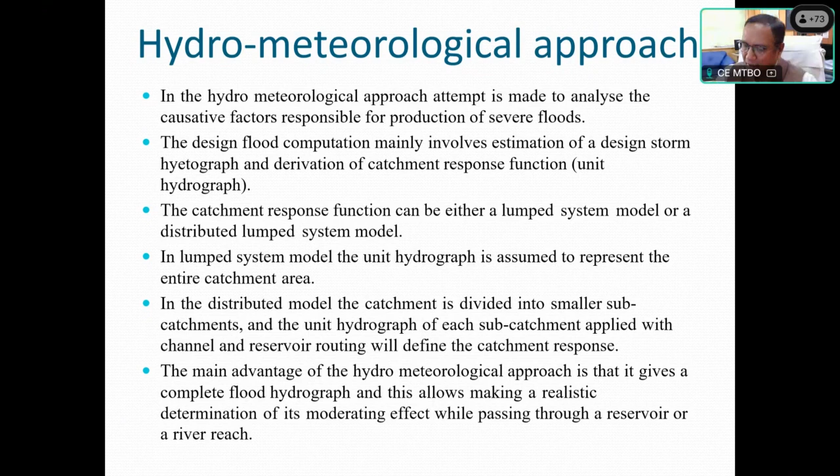And this allows making a realistic determination of its moderating effect while passing through a reservoir or a river reach. Now, as already I told, when you are going for the design flood using hydrometeorological approach, then the storm study is one of the most important components of design flood analysis.

So for storm study, what is required? Daily rainfall records of all rain gauge stations in and around the region under study, then rainfall data of self-recording rain gauges, and data of storm dew point and maximum dew point temperature. This is a very Herculean task - a lot of time is required. So just to save that time, Central Water Commission, in association with IMD, and even IMD alone, have published the Probable Maximum Precipitation (PMP) atlases.

In those PMP atlases, how has it been formulated? For making those PMP atlases, data right from 1906 up to say year 2014-15, whenever the study started, is used, and the PMP atlases are also revised after every 10 or 15 years. By that time, whatever storm records are collected are analyzed, and it starts from rainfall data only. Based on the rainfall data, storm isohyetal maps are prepared. For most of the severe storms, storm isohyets have already been prepared by IMD, and those have been incorporated into the PMP atlas.

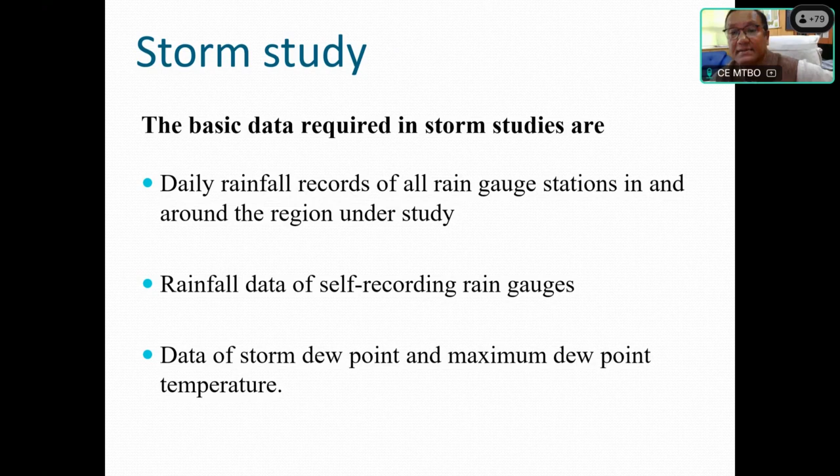Now, another important aspect - a number of people get confused whether to consider 24-hour storm, 1-day storm, 2-day storm, or 3-day storm. Its answer lies in the unit hydrograph. For all practical purposes, the unit hydrograph base governs the duration of storm depth. For a unit hydrograph having a base of 24 hours or less, your 1-day storm shall be sufficient.

Normally we consider TP, time to peak of the unit hydrograph, as one of the criteria too. Suppose your time to peak is 14 hours, and your base is 28, 29, or 30 hours. So 10% of 14 is 1.4, giving a total of 15.4. So any storm having duration of 16 hours or more will suffice your requirement. In that case, your 24-hour storm or 1-day storm shall be sufficient.

In the case where the UG base is more than 24 and less than 48 hours, normally we consider like that, but even up to 32 hours you can - you should consider 1.1 times TP also. But if it says 46 or 40 hours, then you have to consider your time base of the unit hydrograph as 40 hours, and you have to consider a 2-day design storm. For basins having UG base of more than 48 hours, a design storm of 3 days should be considered. Normally in Indian conditions, for more than 3 days storm, isohyets are not prepared, so maximum 3-day storm shall suffice for any type of catchment. Storms of period exceeding 72 hours are not generally required to be considered in the design flood estimation.

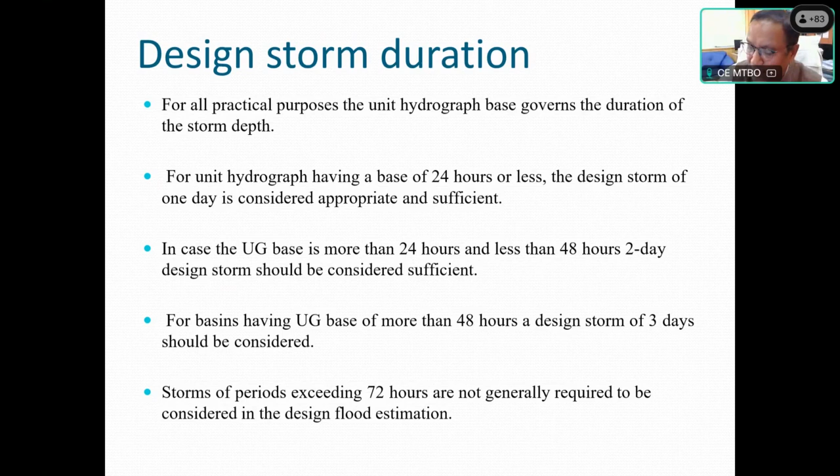Now, how are we estimating the probable maximum storm or SPS, standard project storm? The most common method of estimating probable maximum storm for a project basin is one involving the transposition of selected major storms to the project basin and its maximization there.

This statement doesn't mean that the storm should have occurred only in the project catchment. No, there are criteria for storm selection. Like in the plain area, I will show you which storm can be considered for transposition into the project catchment. So the 3 main steps of transposition and maximization of the storm are: selection and analysis of past major storms on record considered transposable to the project basin. First, remember this - this is very important. You have to select all those major storms which can be transposed into that project basin, and the criteria of transposition will be discussed.

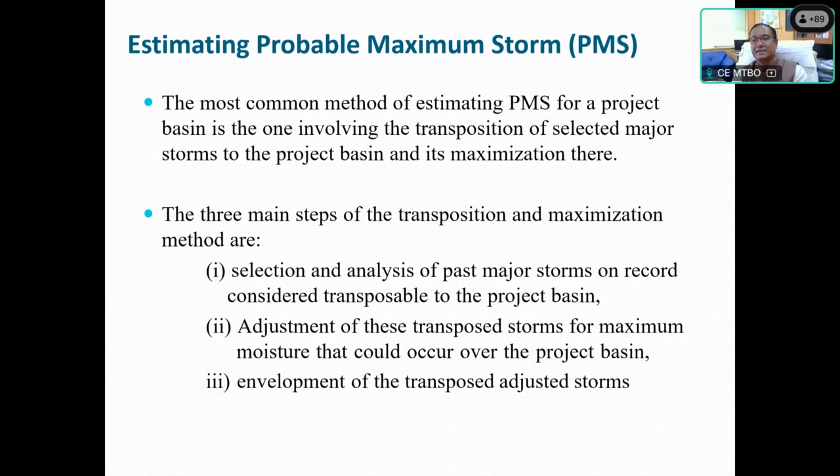Then adjustment of these transposed storms for maximum moisture that could occur over the project basin - that is called the maximization technique. How much extra rainfall could have taken place if, say, the dew point temperature had attained the historical maximum - that is called the maximization of the transposed storm. Then envelopment of the transposed adjusted storms. So these are the three main steps for estimating the probable maximum storm or standard project storm.

Now, what is the criteria for storm transposition? Storm transposition means application of a storm from one area to another area within the same meteorologically homogeneous region.

That is important. You cannot consider the Eastern Ghat storm into Western Ghat, or Western Ghat storm into Eastern Ghat. You cannot take it like that. So it should be meteorologically homogeneous. Like a Ganga Basin storm, we cannot put into the Brahmaputra Basin, and a Brahmaputra Basin storm we cannot bring into the Ganga Basin. So that should be a meteorologically homogeneous region.

The orientation of storms should not be adjusted by more than 20 degrees. For every storm, by seeing the isohyet, you shall be able to know its orientation. So while maximizing the storm in the project catchment, we can rotate the entire isohyetal system, but that rotation should not be more than 20 degrees. This is one of the criteria formulated by WMO, and everybody follows it.

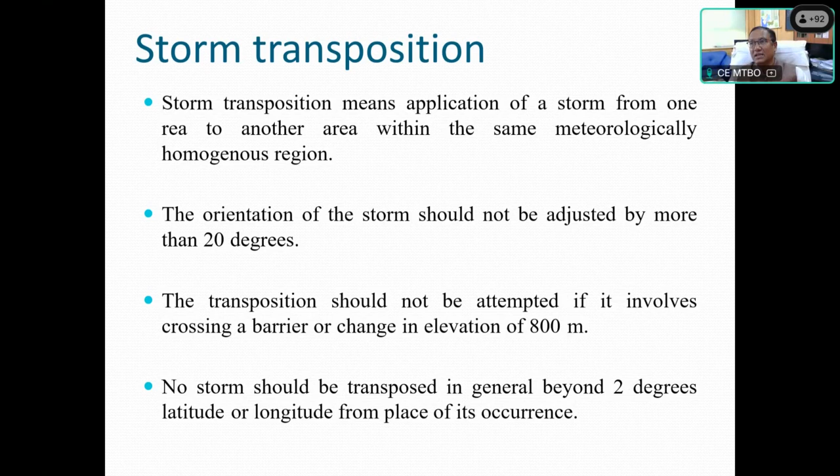Considering those tracks, the 2 degree criteria is applicable for many of the storms. It will not deviate by more than 2 degrees from its track. That's why this 2 degree latitude-longitude criteria has been given, but this is for plain or rolling type terrain. This criteria is not applicable for hilly terrain where the precipitation is of orographic nature.

Now, what is another criteria for storm selection? The area of transposition is considered as 2 degree by 2 degree longitude for nearly flat regions, and 0.5 degree by 0.5 degree to 1 degree by 1 degree in mountainous regions. This is as per para 5.2.2.1.1 of the WMO manual of 1986. This criteria has been evolved by WMO and is followed by most countries.

Coastal storms, storms centered west of the Western Ghat and east of the Eastern Ghat, were not transposed to catchments located far inland. This is very important. Suppose some storm has occurred in Kerala - you cannot transpose that storm into Tamil Nadu, because there is a barrier with height more than, say, 6,000 feet. So since the barrier is there, you cannot transport that storm by way of the basin. And that is a coastal storm occurring in Kerala, but that storm can be transposed along the coast.

Further, suppose a barrier is not there - for example, a storm occurred near Gujarat along the coast. Can I transport that, say, 150 kilometers inward? No, that should be avoided. Normally you can go up to 50 or 100 kilometers from the coast. Beyond that, the storm should not be transported, because the coastal storm has different meteorological conditions, so you should not transport those storms further inland.

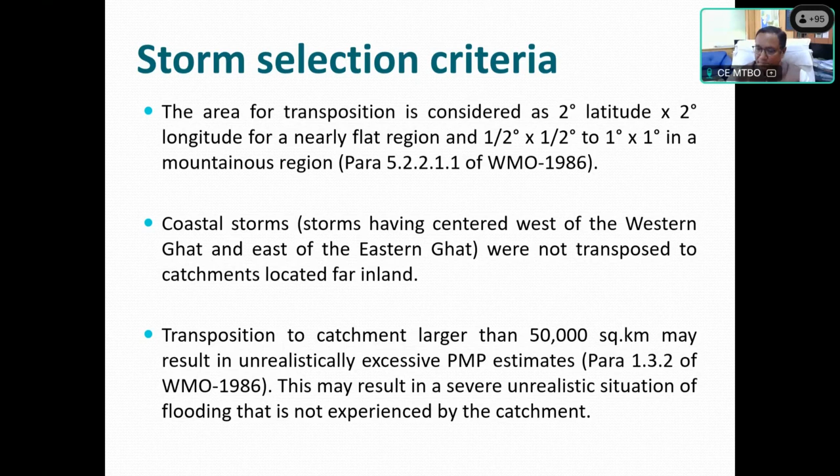Now, how are we going to select the storm and how are we going to calculate different adjustment factors? The first step is to select the transposable storm with maximum rainfall depth and having areal extent to cover the entire catchment.

Suppose you have got 5 storms. One storm has given a 1-day storm of 300 millimeter, another has given 350, another has given say 400 millimeter. But while you see this 400 millimeter rainfall and its isohyet, suppose your catchment area is 20,000 square kilometer, but the outer isohyetal extent of that 400 millimeter maximum depth recorded rainfall is only 16,000 square kilometer.

Then we will not consider that 400 millimeter maximum depth storm. We will check the 350 millimeter rainfall, and see whether it is covering the entire catchment. If it is covering the entire catchment, then we will go for the 350 millimeter rainfall, because if we selected the 400 millimeter storm, the overall catchment representative depth would be less than what we get using the 350 millimeter storm. So we have to consider both the depth and the catchment coverage, whether the storm selected covers the entire catchment or not.

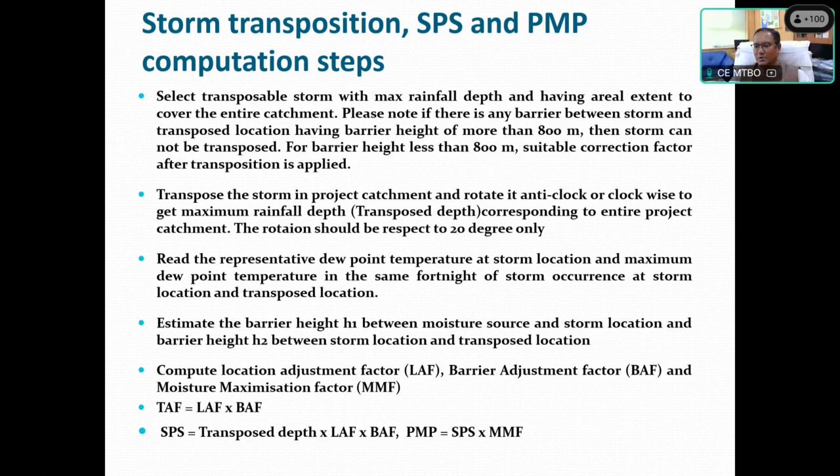Now I will explain how these adjustment factors are worked out, and you should be very careful whenever computing the adjustment factor. It is very easy, but you have to be methodological - follow the procedure step by step. So this is the same moisture source, like Bay of Bengal, and storm occurred at this location, where it is written storm center, a red dot is there.

Now from this location, our project catchment is somewhere here, and wherever in that project catchment we are going to transpose, that will be the transposed location.

Now from the moisture source up to the storm center, there is one barrier. That barrier height, the differential height, shall be called H1. And from storm center to project location, when you are transposing the storm from here to that location, you have to see if there is a barrier. That barrier height we get is H2.

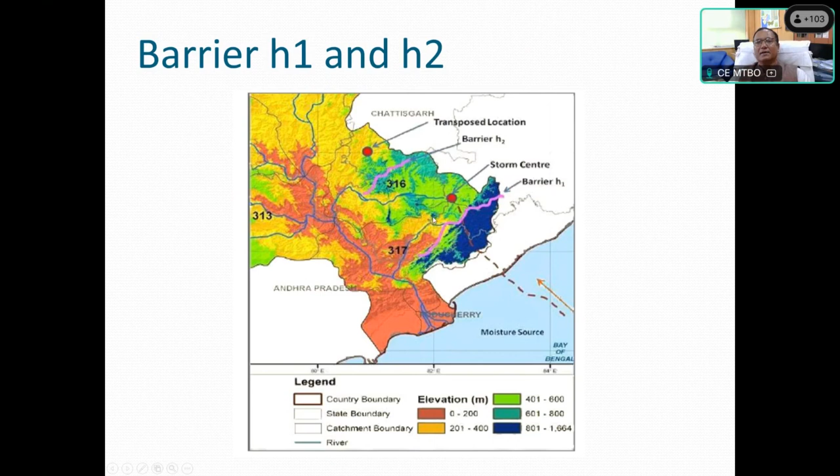Now, how is the location adjustment factor calculated? As it is written in our PMP atlas, outstanding rainstorms in a meteorologically homogeneous region surrounding a project basin are often transposed to the basin to frame the PMP estimate for the project basin. The transposition of a rainstorm necessitates application of two adjustment factors: for location and for barrier.

So the location adjustment factor, LAF, is equal to W3H1 divided by W2H1. This same nomenclature is given in the WMO manual also, so there should not be any confusion. Whatever is given there, we have given in our PMP atlas in the same way.

Now see, H1 is the mean crest elevation of the barrier. As I already told you, suppose somewhere the elevation is 1000 meters, somewhere 950 meters, somewhere 900 meters, somewhere 800 meters, then you have to take the average of that.

So it is the mean crest elevation of the barrier between the rainstorm center and source of moisture, with mean crest elevation higher than that of the rainstorm center.

If it is lower than the rainstorm center, then H1 will not be required. But if it is higher, suppose the rainstorm center elevation is 300 meters but the barrier height is 500 meters, this 200-meter difference is there.

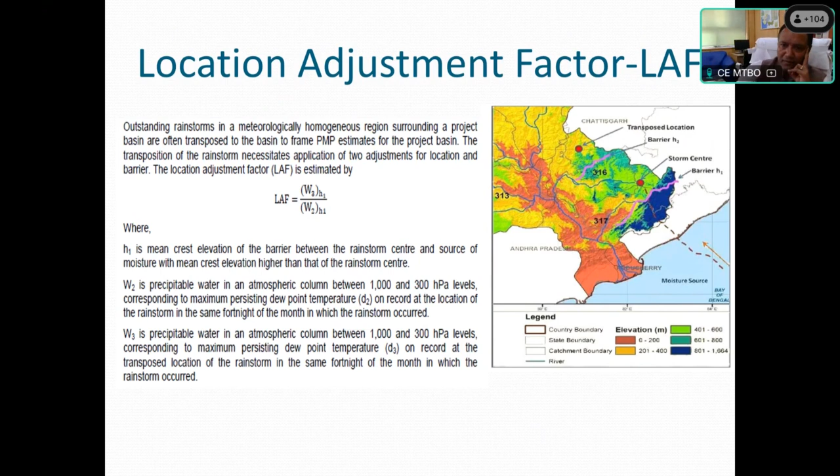Okay, so using this equation, LAF can be calculated. Now, the barrier adjustment factor - I have shown one schematic diagram also for this.

What is this? This blue column that I'm showing is the moisture column which is going to precipitate. Now if the storm is occurring from, say, the windward side, from the sea side, and one barrier is there, then what will happen?

And this barrier is continuous. So corresponding to its crest, its mean crest elevation, the rest of this portion that you are seeing from here to here...

...this much moisture will get precipitated on the windward side. On the leeward side, meaning after the hillock, only this much, what you are seeing through the red arrow...

...only this much precipitation or moisture is available which can get precipitated on the leeward side.

So to account for that, this barrier correction factor is applied, and this is very important because most people do carry out mistakes while estimating the barrier adjustment factor.

I have seen a number of experts, very good experts - while I was estimating for the Sardar Sarovar project, they considered one storm but did not apply the barrier correction factor, even though a barrier was there.

When I applied that barrier correction factor, the flood they estimated was of the order of 1,71,000 cubic, but I got 1,04,000 cubic. So you can imagine around 66,000 cubic difference was there because of that barrier correction factor. So that is very important.

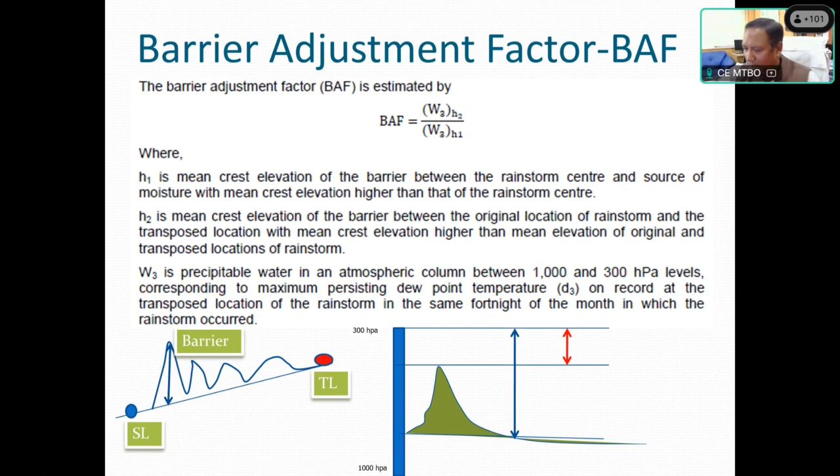Now, another important correction factor is the moisture maximization factor. This is used to convert standard project storm into probable maximum storm. So MMF is equal to W2H1 divided by W1H1.

W2 is the precipitable water in the atmospheric column between 1000 and 300 HPA corresponding to maximum persisting dew point temperature D2 on record at the location of storm, and W1 is the precipitable water in the atmospheric column between 1000 and 300 HPA level corresponding to representative persisting dew point temperature at the storm location. So this is in situ, where the storm occurred.

At that location, moisture maximization factor is applied, because whenever we are computing probable maximum storm, our PMP depth is always calculated. First you calculate the SPS depth, then multiply with moisture maximization factor. That will give you the value of PMP.

Or you can directly calculate, if you multiply moisture maximization factor with LAF and BAF, you get the moisture adjustment factor, and your PMP will be transpose depth into MAF. But I will again say you should follow this step: first calculate SPS, which is equal to transpose depth into LAF into BAF.

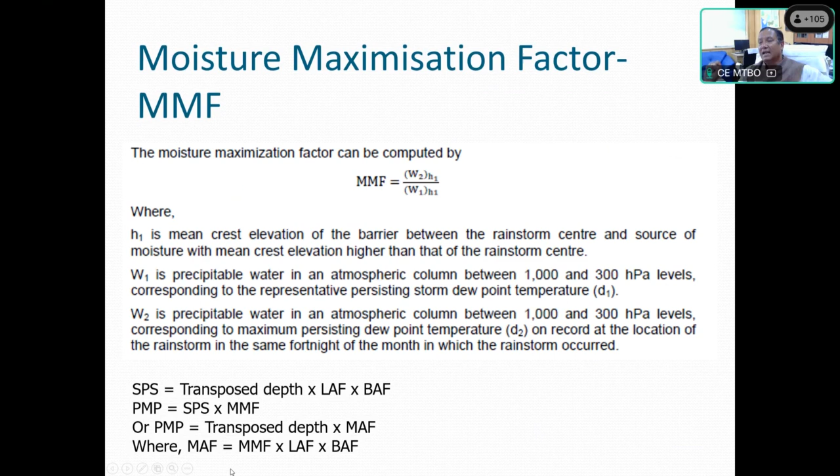First calculate SPS using transpose depth into LAF into BAF formula. Then calculate the PMP value by multiplying the SPS with MMF, because PMP can be equal to the SPS or more. Normally PMP will be 20% or 25% more depending upon the moisture, or 7% more if near the coast, but in inland areas it may be even 40% to 45% more than the SPS. PMP value can never be less than the SPS. This basic fundamental you should always remember.

Now, this was all about the storm: how we select it, how we transpose it, and how after transposition we calculate the SPS depth, standard project storm, used for the SPF calculation, or PMP depth, by applying the suitable correction factor.

Now, let us discuss about the basin response characteristics, that is the unit hydrograph. So what is the unit hydrograph? That is the response of the catchment for one unit of rainfall excess. That unit may be 1 centimeter, 1 inch or 1 millimeter. It hardly matters, you can consider any unit.

But if you are considering here 1 centimeter, then your rainfall should also be in centimeter. If you are considering 1 millimeter, then your rainfall should also be in millimeter, because once you have made this unit choice here, you have to use the same unit there also.

If you have considered here 1 centimeter and made the 1 centimeter unit hydrograph, but your rainfall is in millimeter, and you multiply this 1 centimeter unit hydrograph ordinates with the millimeter rainfall, then you are committing a big mistake. In that case, you have to convert this 1 centimeter.

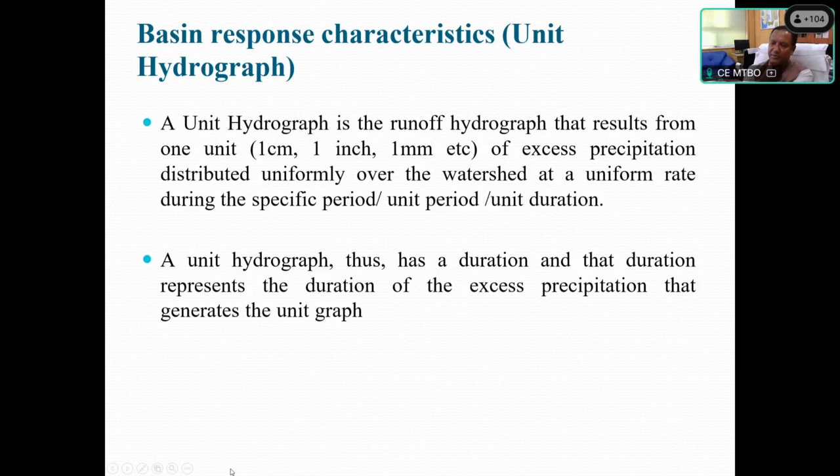In that case, if a 1 hour unit hydrograph is there, then you can take the hourly distribution coefficient, and using that hourly distribution coefficient, you can go for the convolution.

Now, derivation of unit hydrograph. The unit hydrograph is best derived from the observed hydrograph resulting from a storm which fulfills two basic conditions. Number 1, the rainfall is more or less uniformly distributed over the basin and has a reasonably uniform intensity. Such a hydrograph will generally form a simple and short peak.

If such an observation is there, then using Collins method - and all those methods are given in the textbook - you can work out the unit hydrograph for that catchment. Another way, if you have concurrent rainfall and discharge observation data, then using the Nash and Clark method also you can derive the unit hydrograph from the observed data.

If such a hydrograph is not available, then the unit hydrograph has to be derived from the analysis of an observed complex event. For a complex event also, the Nash model is a good alternative - using that complex event, you can make the unit hydrograph.

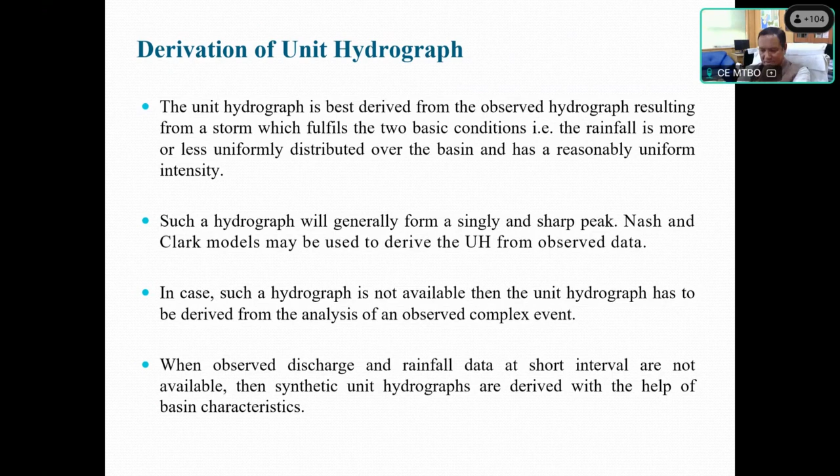When observed discharge and rainfall data at short intervals are not available, then we can make this synthetic unit hydrograph using the basin characteristics like longest flow path, catchment area, basin centroid, basin centroidal longest flow path. Using those, there are the Snyder's method and flood estimation reports.

Central Water Commission has published a number of flood estimation reports for different regions, like FER 2A for North Brahmaputra, FER 7, FER 3A, 3B - a lot of flood estimation reports of different regions of the country are available. So if you are estimating the flood and you don't have observed data, it is better to use the flood estimation reports of CWC.

Don't use the Snyder's method, because in these flood estimation reports, the fundamental is the same as the Snyder's method, but here the coefficients have been worked out for the different equations, based on a number of observed data at different bridge sites. It took a lot of effort to prepare those flood estimation reports, because that data was collected in association with the Ministry of Railways and Ministry of Surface Transport at a number of bridge locations.

This hydrograph or hourly gauge data and discharge data were collected, and in the project catchment, a number of rain gauge stations were also installed. A lot of data was collected for a fairly long period, 10 or 15 years. Using that observed data, these synthetic unit hydrographs or flood estimation reports were developed.

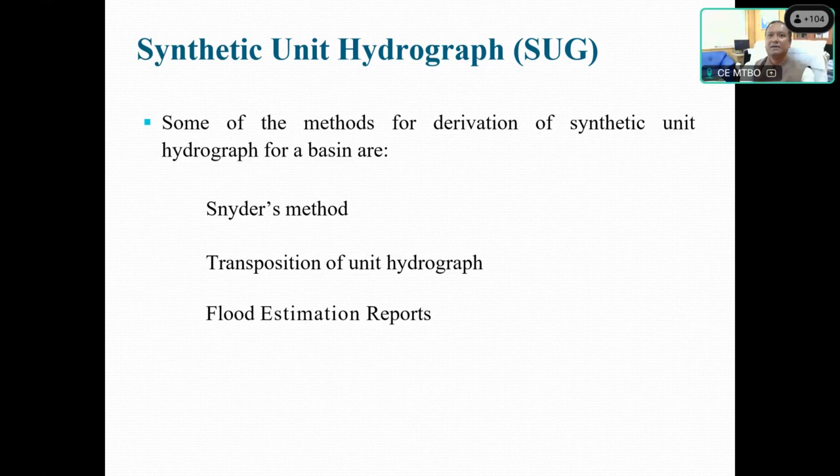Now, design flood hydrograph. For estimating the design flood hydrograph, the effective rainfall increments of each bell are rearranged with respect to ordinates of the unit hydrograph such that the maximum rainfall is placed against the maximum UG ordinate, the next lower value of effective rainfall against the next lower value of synthetic UG ordinate, and so on. That is called the critical sequencing.

Once you have got the unit hydrograph, and then you have got the storm hydrograph, then from the storm hydrograph just deduct the losses. You will get the effective storm hydrograph, and then go for critical sequencing, arranging the maximum rainfall against the maximum UG ordinate, second maximum against the second maximum UG ordinate. That is called critical sequencing. Once you have got the sequence, that sequencing is reversed. That is basically an optimization technique.

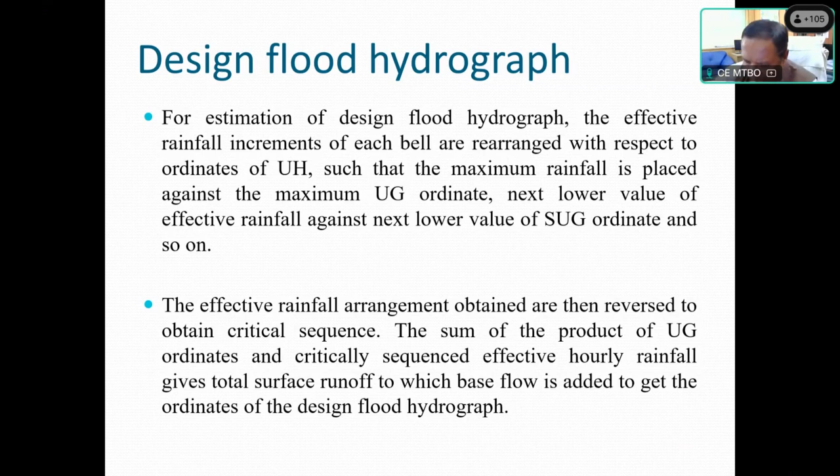The effective rainfall arrangements obtained are then reversed to obtain the critical sequence. The sum of the product of UG ordinates and critically sequenced effective hourly rainfall gives the total surface runoff, to which you have to add the base flow to get the design flood hydrograph.

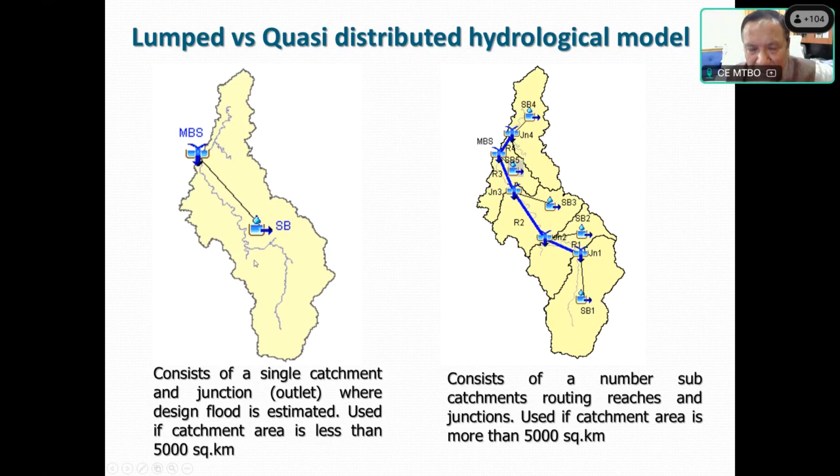Now let me explain. I am not going to discuss the single lumped response for a single catchment, because for a single catchment you need not go for storm transposition. In most cases, you can take the PMP value corresponding to your catchment area, the areal PMP value from our PMP atlas, where a table is given. But for a large catchment, transposition is required.

And for that transposition, suppose you have made 3 or 4 sub-catchments, so for each sub-catchment you have to estimate the depth of rainfall. I will explain this through a case study of the Gundlakamma project.

This is a project situated in Andhra Pradesh. It is constructed across the Gundlakamma River in Prakasam district. Its location is given as 15°40' north and 76°46' east. FRL is at elevation 24.38. Live storage is 55.8 MCM.

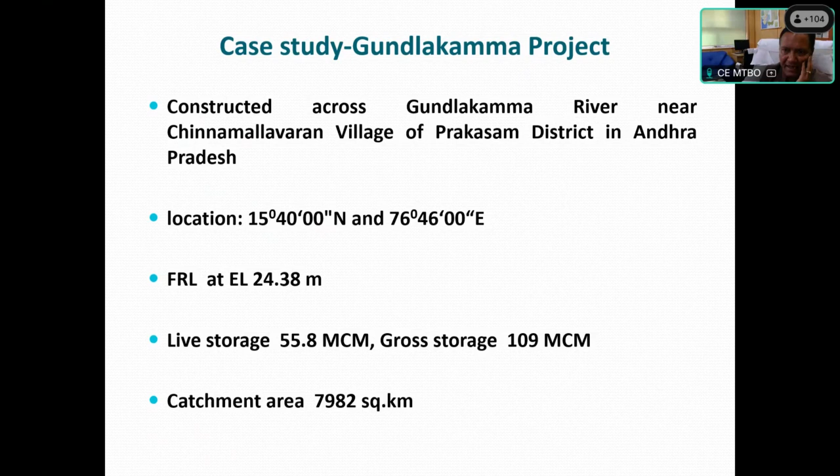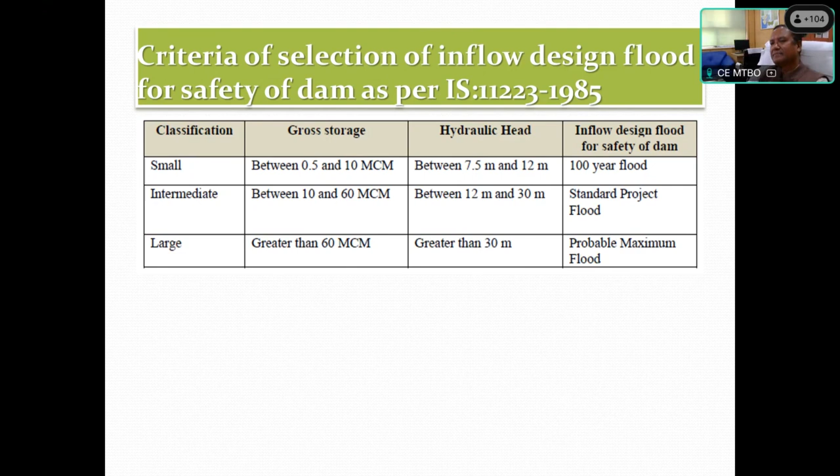As per criteria, if any of this criteria is like gross storage and hydraulic head, using this criteria as per given in IS 11223/1985, you have to select the appropriate inflow design flood. It may be 100-year standard project flood or probable maximum flood. It is important to mention, if suppose a project has hydraulic head of only 20 meters, but gross storage is 90 MCM, then either criteria being met qualifies this project for the probable maximum flood. So if any of this criteria is meeting, then you have to consider the appropriate design flood.

You can make 5 subcatchments also, 10 subcatchments also, but ultimately your design flood value will be of the same order. Your maximum difference may be of the order of 0.5% or 0.2%. So too many subcatchments are not required. That's because somebody was asking how many subcatchments are needed.

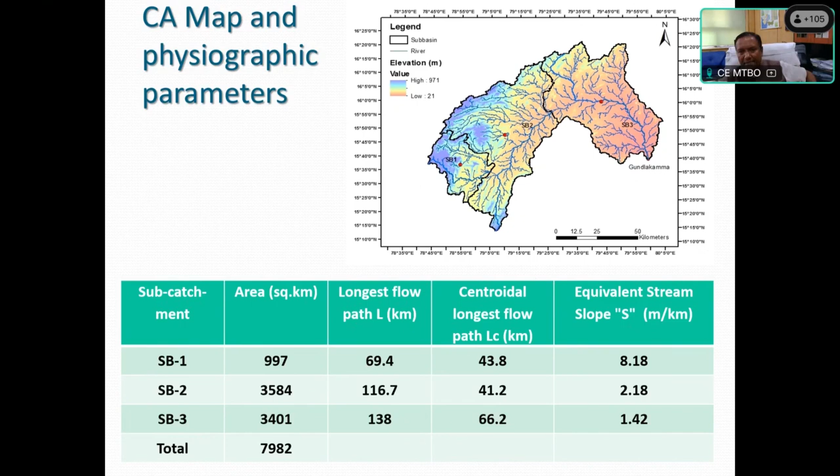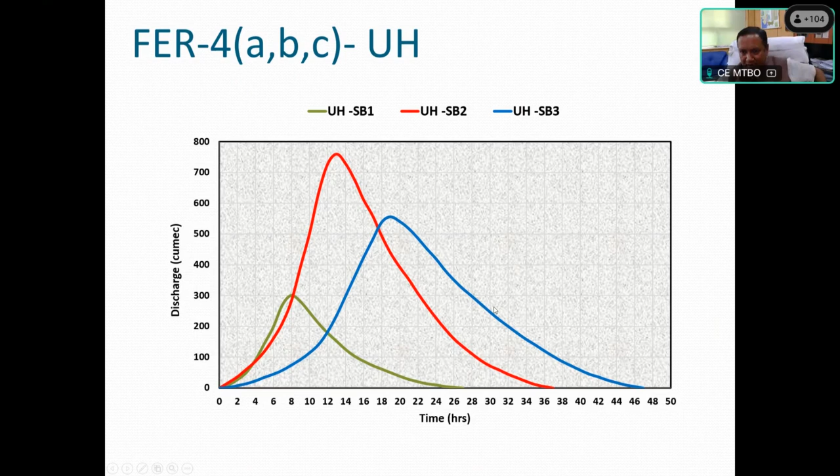Using those parameters and the flood estimation report, because here the observed concurrent rainfall data was not available, we used the flood estimation report. That flood estimation report subzone is 4(a,b,c), applicable for Andhra Pradesh, that particular basin. So what you are seeing here is the unit hydrograph of subbasin 1. This red color is the unit hydrograph of subbasin 2, and this blue color is the unit hydrograph of subbasin 3.

This Gundlakamma project lies in the Cauvery Basin. For that, we have the PMP Atlas published by CWC in May 2015. From the PMP Atlas, what we found is this project qualifies - seeing the catchment area and the time base of the unit hydrograph, this project qualifies for a 2-day storm for design rainfall depth computation.

Further, from the PMP Atlas, we found the 2-day storm for the Gundlakamma project catchment is the storm dated 13 to 14 May 1979, with the eye of storm at Santhajutur, recording a 2-day peak of 525 millimeters at its eye location. This Santhajutur rainfall had a 2-day peak of 525 millimeters at its eye. Correspondingly, if you are considering the 2-day storm, then for the same storm you have to see whether a 1-day storm is available or not.

If not available, then you have to consider the 2-day storm only, and using the 2-day distribution coefficient, you have to work out the 48-hour distribution coefficient to find the rainfall depth in 24 hours. But if the 1-day storm is available, then you should consider that 1-day storm.

In most cases, you will get 1-day, 2-day, and 3-day storms of the same occurrence. The corresponding 1-day storm was of 13th May 1979. It may be 13th or 14th May, so whichever day is maximum, that shall be considered the 1-day storm. This has already been accounted for while giving the 1-day or 2-day storm name in our PMP Atlas, so you need not worry about that analysis. Here it has been the 13th May storm.

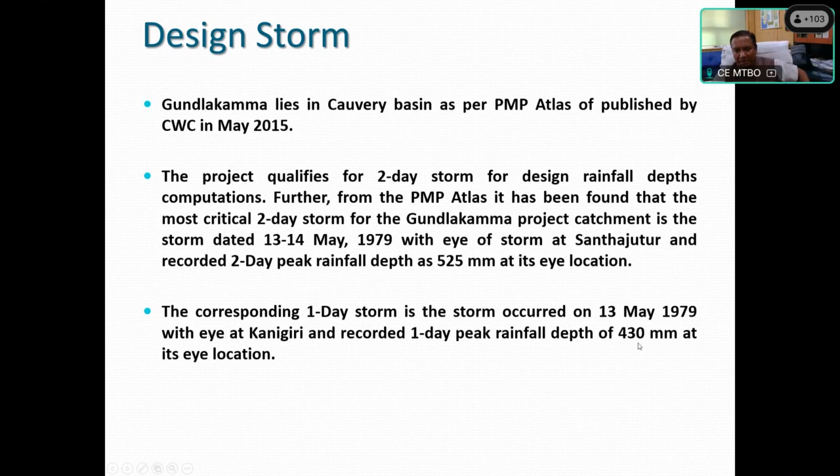Now, based on the critical transposition of the storm isohyets, because for both 1-day and 2-day, they are to be transposed, the transposed depth for each subcatchment has been computed. The procedure I have already explained, and we follow the same procedure. The transposed depth has been multiplied with the transposition adjustment factor (TAF) and the moisture maximization factor to get the 1-day and 2-day PMP for each subcatchment.

The rainfall persisting dew point temperature normalized at 1000 HPA was 24.8 degrees centigrade. The maximum persisting dew point temperature in the first fortnight of May at Kanigiri, normalized at 1000 HPA, is 28.4. Why am I writing normalize?

Because 1000 HPA means mean sea level. Suppose this dew point temperature was recorded at a location where the observatory was, say, at 300 or 500 meter elevation. That temperature has to be adjusted corresponding to mean sea level. Only then can you utilize it.

So you should be very careful. In our PMP Atlas, that has already been accounted for. But for a new storm, if you are analyzing and your observatory was, say, at 500 meter elevation, whatever dew point data you have, you correct it corresponding to 1000 HPA. For that also, a chart is given in the PMP Atlas as well as the WMO manual.

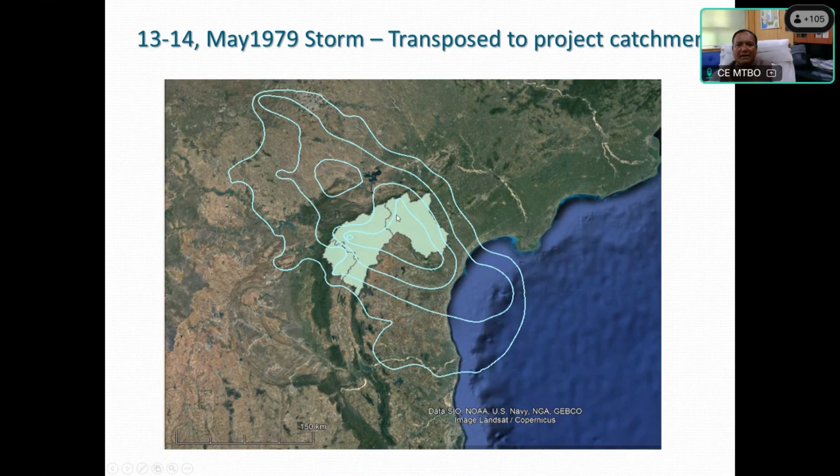So corresponding to the maximum depth location, this is the isohyetal pattern. This is the location where we have transposed. Now, if you see here, what is the barrier?

If you see here, the moisture source is this, I have just used Google Earth itself, you can see. And here the location is 114 meter.

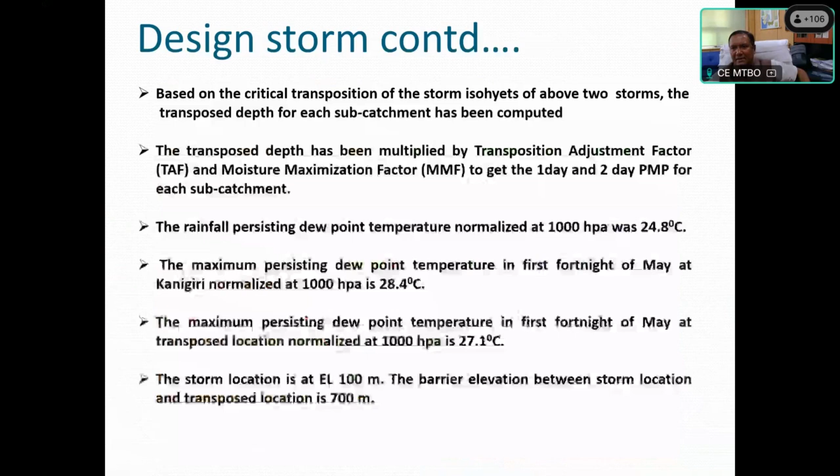So there is no barrier between the storm location, moisture source, and storm location. So average 100 meter or 114 meter, whatever we have considered, like here, this 100 meter storm location elevation has no barrier. So H1 height shall be taken as 100 meter itself here. The H1 will be 100 meter, because there is no barrier.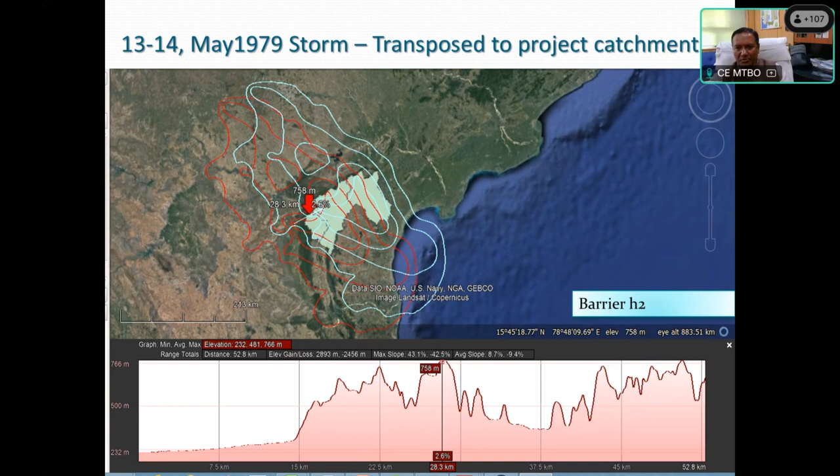So that barrier elevation we have noted as H2, and then for 1-day and 2-day final transposition we are getting the maximum depth isohyetal pattern you are seeing here. How we have calculated: D1 means persisting dew point temperature was 24.8.

It is given in the PMP atlas for that storm. D2 means maximum dew point temperature in the same fortnight when the storm occurred at Kanigiri location, that is 28.4 degrees centigrade. And at the transposed Gundlakamma project location, where we have put the eye at that location, the maximum persisting dew point temperature, the projected dew point temperature in the same fortnight is 27.1 degrees centigrade.

So using this WMO table, which is also given in our PMP atlas, we have got W1H1 as 77.2 millimeter. This is the equivalent moisture column which is likely to precipitate. W2H1 is 105.4 millimeter, W3H1 is 94.2 millimeter, W3H2 is 80.4 millimeter, and height of barrier H1 is 100 meter.

Height of barrier H2 we have considered the average height, this is the mean height, 700 meter. So using this we have found the LAF at 0.89, the barrier adjustment factor 0.85, and moisture maximization factor equal to 1.36.

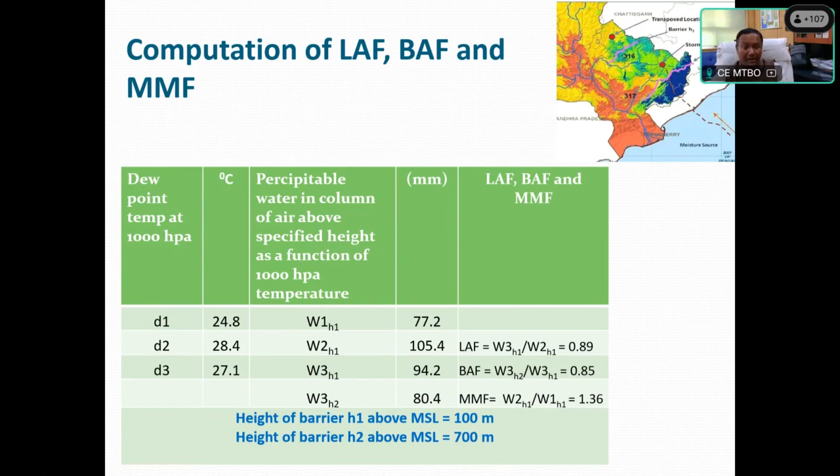It means your SPS is going to be 36% more, your PMP is going to be 36% more than the SPS. So for each sub-basin, SB1, catchment area, transpose depth for 1 day and 2 day, SPS value for 1 day and 2 day, and PMP value — for each sub-catchment we have estimated the SPS and PMP value.

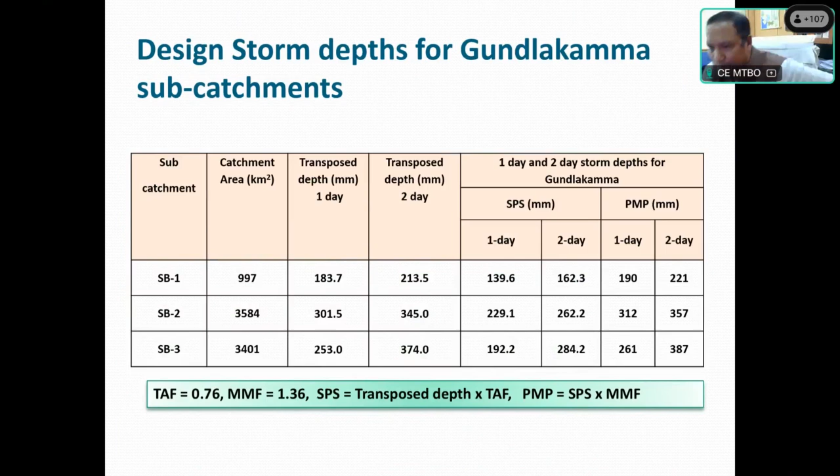Now, once we have got these values, the hourly distribution coefficient is also available in the PMP atlas. So distribution coefficient for the 24-hour spell, and then we have considered normalized distribution coefficient for the 12-hour spell. Why are we considering a 12-hour spell?

In India especially, what we have found after analyzing around 100 sets of rainfall data is that generally in 1 day, in one 12-hour period — maybe afternoon or any time within the 12 hours — that rainfall is around 65 to 70% of the 24-hour rainfall, because this bell condition is not applicable for European countries and others.

It is applicable only for the Indian continent, because India is the only country which has a fixed storm track and monsoon pattern, and here the rainfall characteristics are specific to our country. That's why this bell theory has been evolved, because 70% of the rainfall occurs in 12 hours. So that's why two bells are considered for each day, each bell being 12 hours.

Like what you are seeing from this distribution, this 12-hour rainfall is about 73.4% of the 24-hour rainfall. So to get the normalized distribution, first you get the 24-hour depth, then what will be the 12-hour depth?

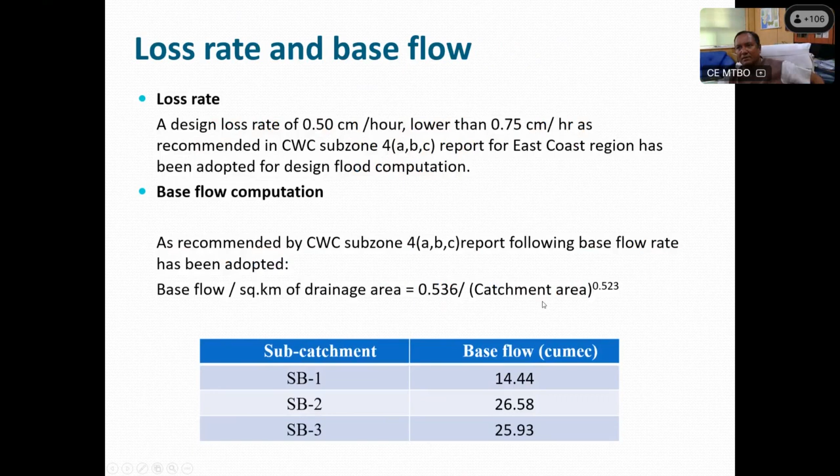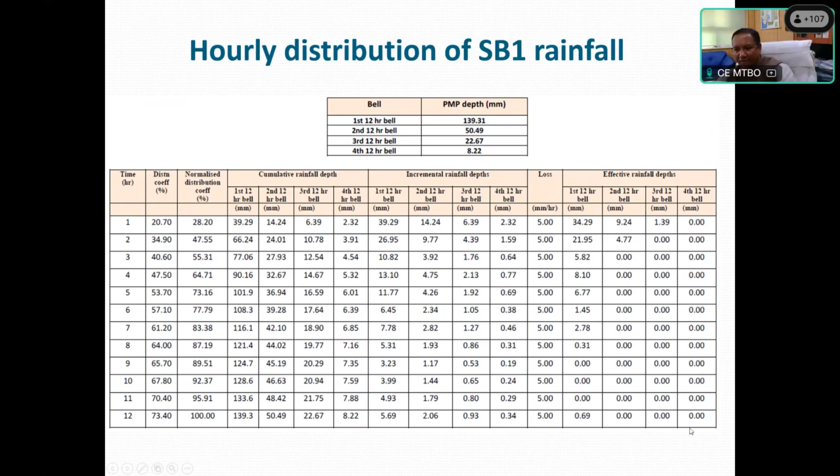Then you have to subtract the losses. After subtracting the losses, if there is any negative value, then you have to make it zero. It means zero runoff will be generated from that hour of rainfall. So that way we get the effective rainfall depth for each bell.

And then for each cell we have to go for SB1, SB2, SB3. This computation will be the same. Then, because you need not go for critical sequencing for each subcatchment separately - earlier people used to do that, but it hardly matters.

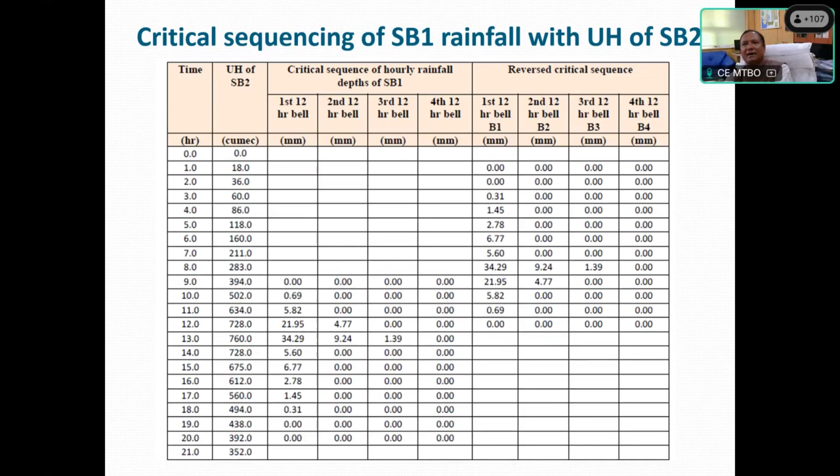Better, out of SB1, SB2, SB3, we have carried out critical sequencing with respect to the UH of one subcatchment. We considered the UH of SB2, which is central, and its UH was also giving the maximum peak. So with respect to that, we carried out the critical sequencing of the rainfall using the UH of SB2.

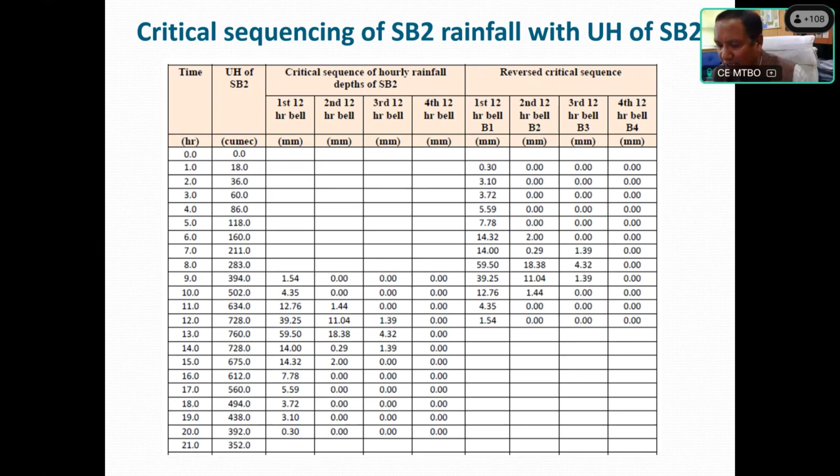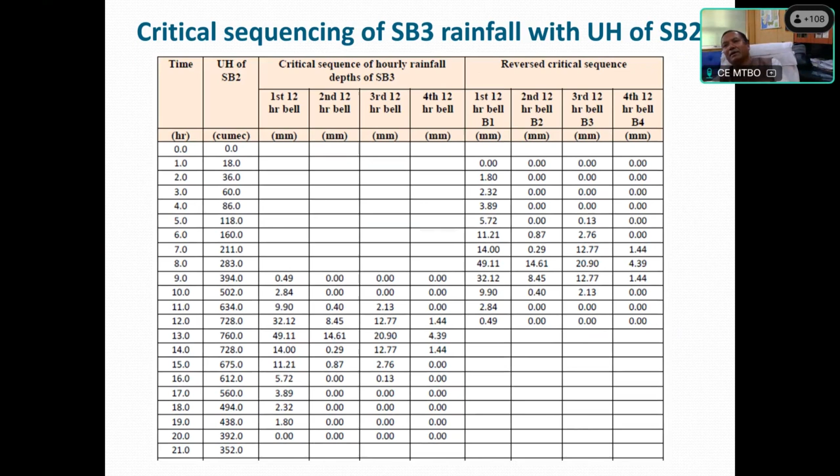Once you have done the critical sequencing, the reverse critical sequencing has to be convoluted with the unit hydrograph of that particular subcatchment, not of SB2. For SB2, you will use SB2 UH. For SB1, you will use SB1 UH. For SB3, you will use SB3 UH. So critical sequencing for SB1, SB2, SB3 was carried out using the UH of SB2 only, but the convolution - this critical sequencing rainfall - shall be convoluted with the UH of that subbasin only.

Now, this is the HMS model. What you are seeing here is SB1. Its lumped response is coming at junction 1. From junction 1 to junction 2, we have made one routing reach, R1. At junction 2, the lumped response of SB2 is coming. And for SB3, no evaporation losses are considered here.

Losses mean we have already considered the losses. Evaporation losses you have to consider in the water availability analysis, not in the design flood. Somebody was asking that question - I have just replied to that.

So SB2's lumped response comes at junction 2. SB3's lumped response comes directly at the project. So how does the system work? SB1's lumped response is collected at junction 1, and from there it is routed through reach R1 to reach junction 2. At junction 2, SB2's response is also coming in, so both are added, and then the total flood hydrograph is routed through reach R2 to get the routed flood hydrograph at Gundlakamma, which is then added with the SB3 lumped response. That gives you the resulting design flood hydrograph at Gundlakamma.

Now, when going for routing, most of the time we use Muskingum routing. You can also go for hydrodynamic routing, but for that you need the river cross section. Muskingum routing, if you stick to the stability criteria, gives around 95 to 96% accuracy compared to hydrodynamic routing, and it is also very cheap since you need not go for any cross section survey etc.

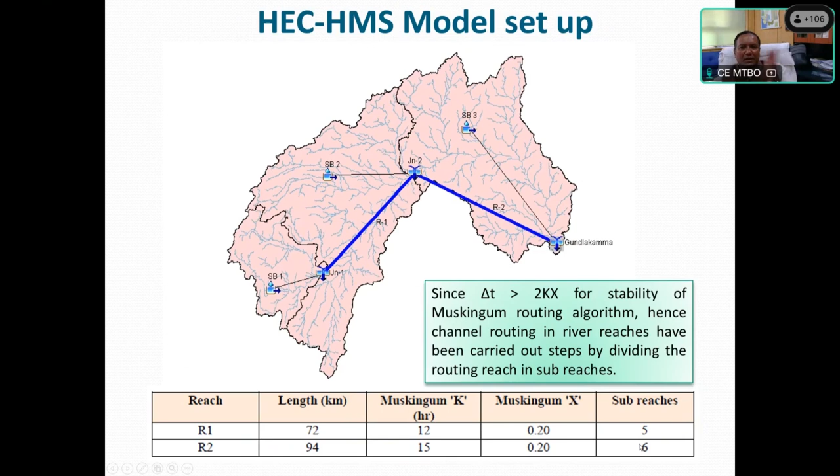For the stability of the routing criteria, while routing you have to make a number of sub reaches. In the model you have to give the number of sub reaches, like we have given 5 here, 6 here, so your routing algorithm is going to be stable. Otherwise, if you are not following that, you will not get a proper routing result, and your estimated flood will be less in comparison to the actual correct flood.

But if you are doing this on Excel, people try to match peak to peak. I think that is a foolish thing people do. You should never go for peak to peak matching in natural conditions, because the travel time is only for lagging the peak, that is the natural phenomena. Don't try to play with the natural phenomena; whatever is happening naturally, you should consider that.